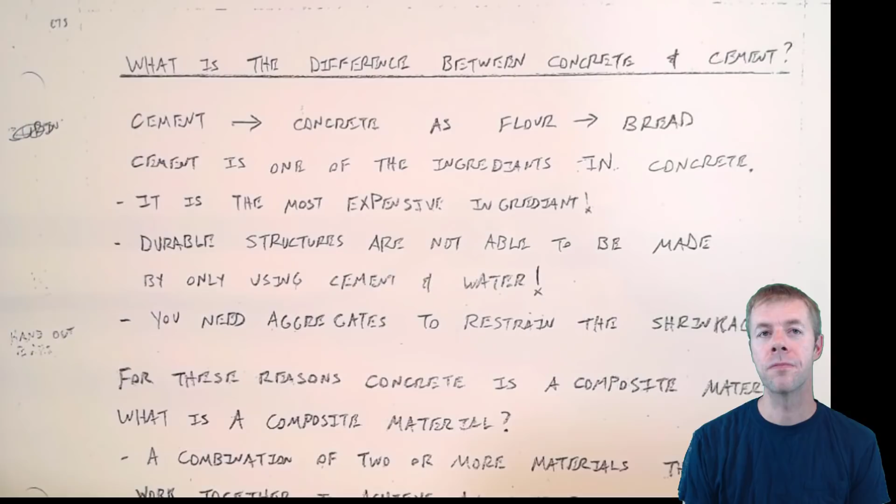It's called paste. We're going to learn all about these crazy terms today. Let's start with that question again: what is the difference between concrete and cement? Well, cement is to concrete as flour is to bread. Cement is one of the ingredients inside concrete. It's a really important ingredient. It happens to be the most expensive ingredient, but durable structures are not made by only using cement and water.

To make a durable structure, you're going to need to add aggregates. Why is that? Well, aggregates do lots of good stuff. One thing they do is restrain shrinkage. Shrinkage is where the concrete, or the cement paste, actually changes shape over time, usually because of changes in where water is. We need something to hold that back, and the aggregates do a great job of that. If I just had a big block of cement paste, that is cement plus water, it would crack itself up. Those aggregates help restrain those cracks. They won't happen—well, they might, but they'll be on a very small scale. They won't be as large.

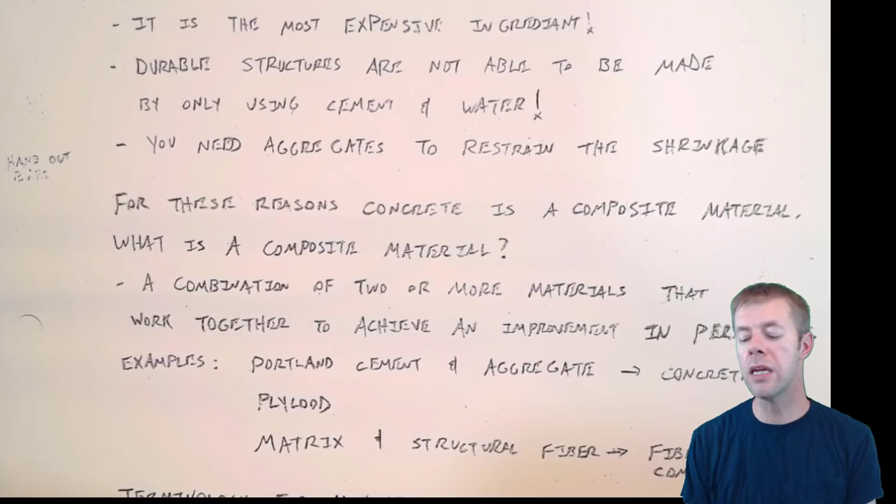Also, aggregates are way cheaper than cement. Way cheaper. So by adding it, you're diluting the material. But aggregates are pretty strong, right? Yeah, pretty strong. So you're diluting the material down, and you're getting something that's more durable. This idea where we combine two different materials together is called a composite material. It's a combination of two or more materials that work together to achieve an improvement in performance. That could be a reduction in cost, an improvement in mechanical performance, could be more sustainable—there's all kinds of good things composite materials can do. Composite materials are very powerful. And the most used composite material on earth is concrete, because it's awesome.

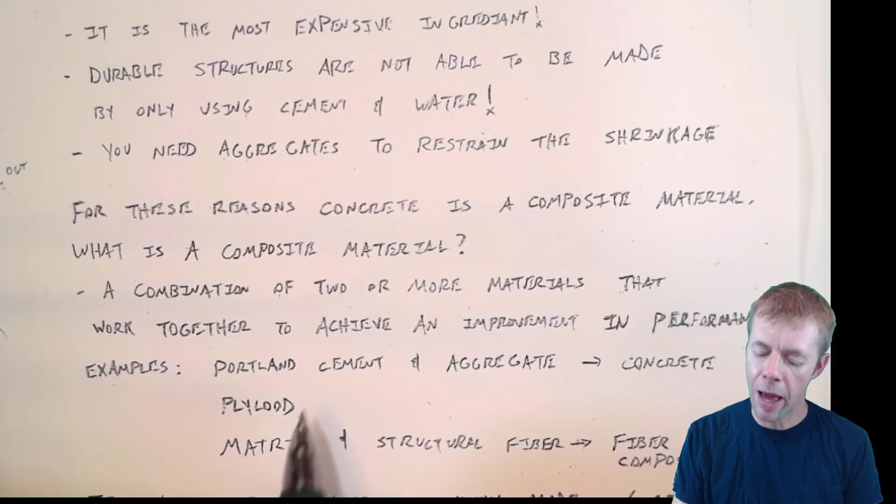So what are some examples? Portland cement plus water plus aggregates is how we make concrete. Again, extremely popular composite material.

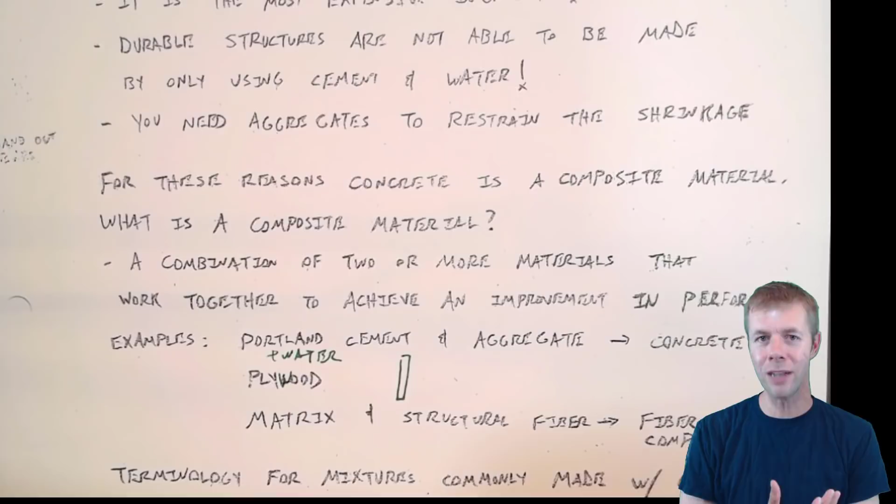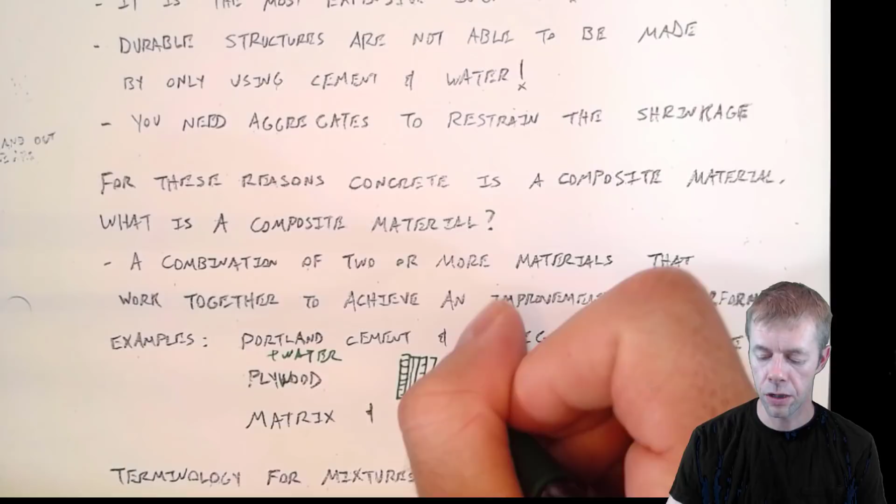There's also something called plywood. What's plywood? That's when you take thin sheets of wood and glue them together. Those thin pieces are from different cuts in a piece of wood. It helps keep them more dimensionally stable—meaning they don't change dimensions. So we may have one piece of wood cut this way, and another piece cut a different direction, with the grains going in an opposite direction. And then we'll come back with another one, and another one. Again, by gluing them all together, not only do you make it less expensive, but you get a better performing material.

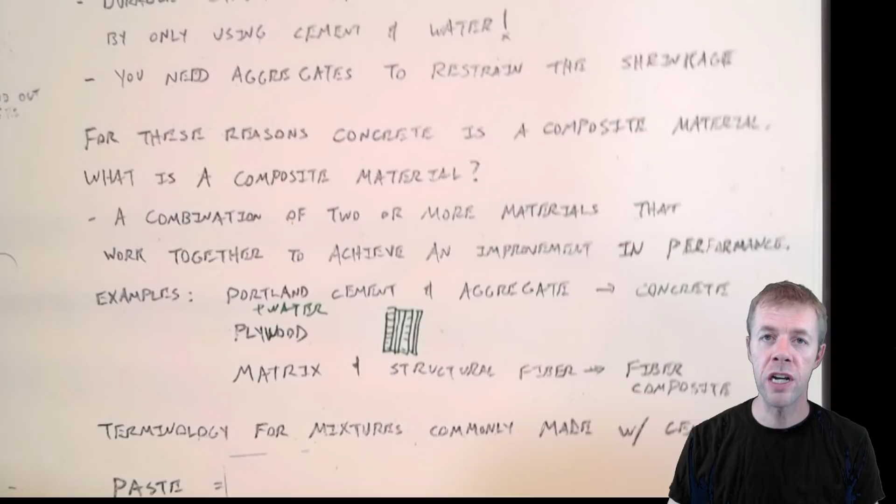Fiber composites, another very popular composite material. That's where you take structural fibers and maybe glue them in a fiberglass matrix to help hold them together. These little bitty fibers by themselves are not that strong, and the matrix is not that strong, but together, now they have pretty good strength.

It's pretty cool. Now let's talk about some more terminology. This is kind of the basic words, so you can start to set the world straight, because it's your job from now on to change people's minds about concrete, or let them know that it's not cement, it's concrete.

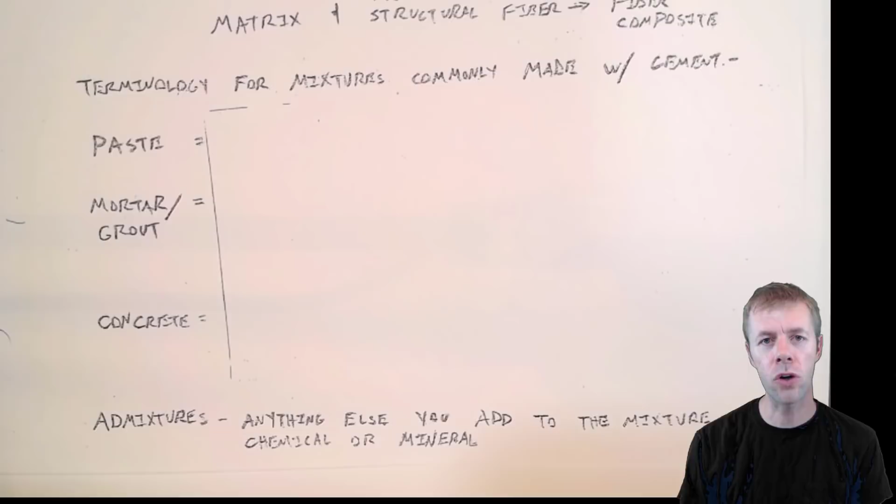Let's talk about paste. Paste is when you take cement and add water—that's how you get paste. When I call something paste, and I'm talking about concrete, that's what I'm talking about. It's like the glue that holds everything together. That's why it's called paste.

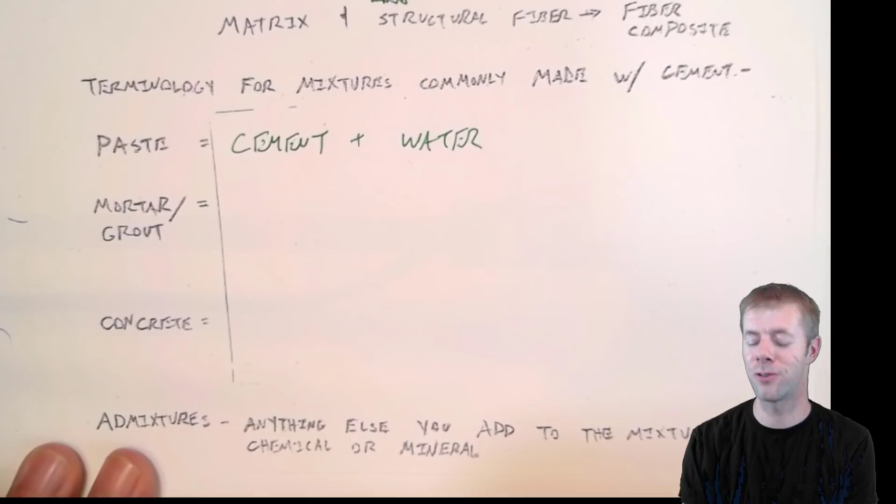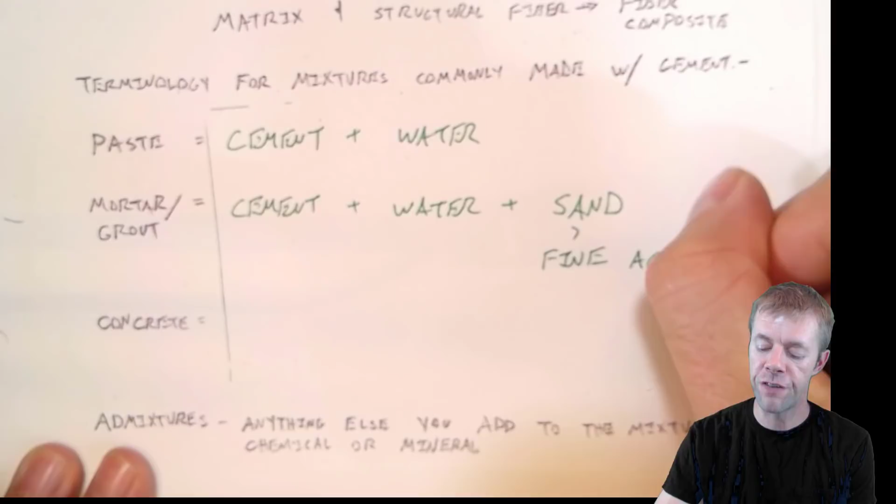Now let's talk about the next one. If I take my cement and add water to it, and add one more thing—if I add sand to that—then I get a grout. And sand is also known as, sometimes in this video, something called fine aggregate.

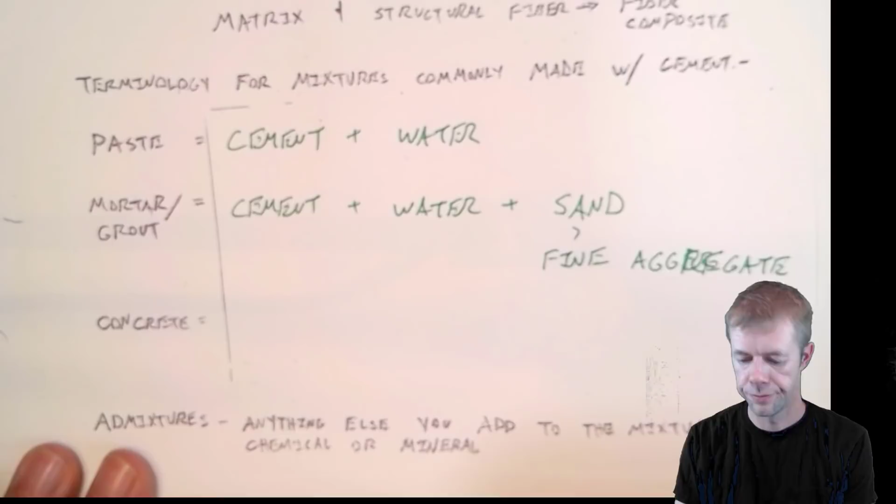Fine aggregate. Now, to make concrete though, we need one more ingredient. We need cement or some kind of binder. We need water. We need sand. And we need something called stone or gravel, or you might call them rocks. And the fancy term for rocks is something called coarse aggregate.

Fine aggregate, that's the small stuff. Coarse aggregate, that's the big stuff. And admixtures, oh man, we use a lot of admixtures. That's anything else you throw in the mix.

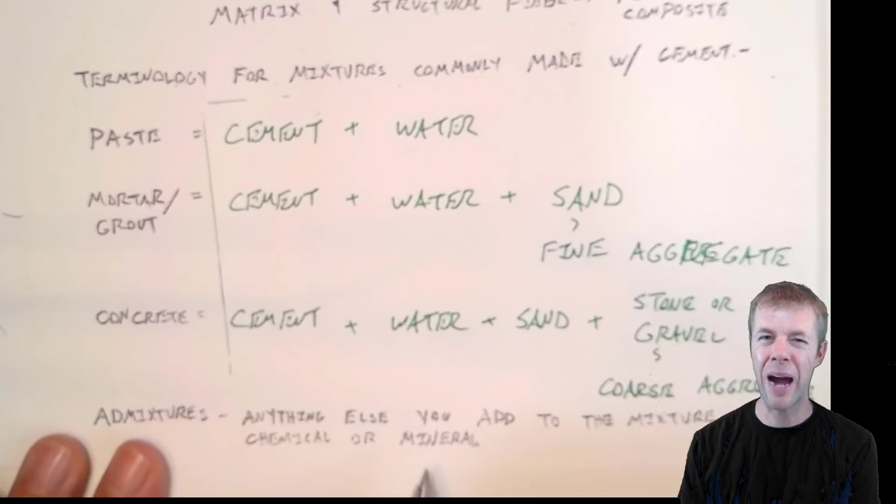That's all the herbs and spices that help really give it cool new properties. Admixtures are really exciting, we'll talk about them coming up. They may be chemicals you add, or they may be minerals, more like powders that you add. These are both kind of mislabeled names because pretty much anything you add is made up of a chemical, and a lot of things you add may be a mineral, and even minerals have chemicals in them. But historically, we've called them either chemical admixtures or mineral admixtures. We'll talk more about those coming up.

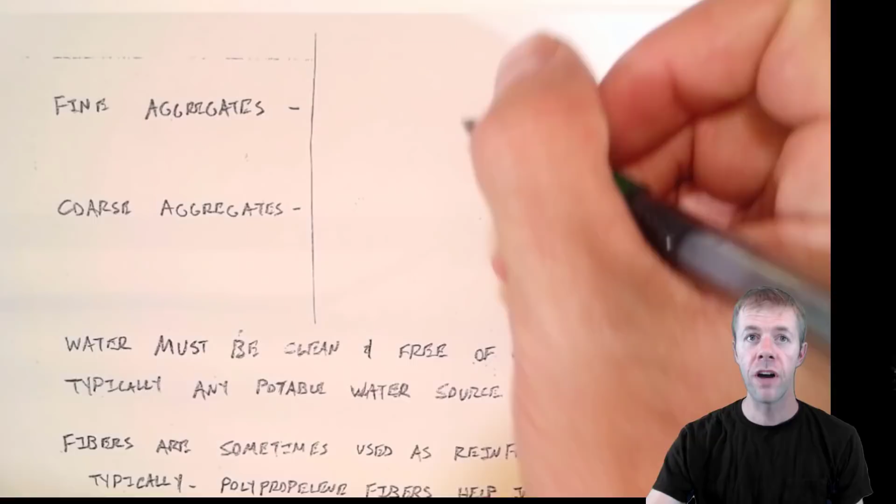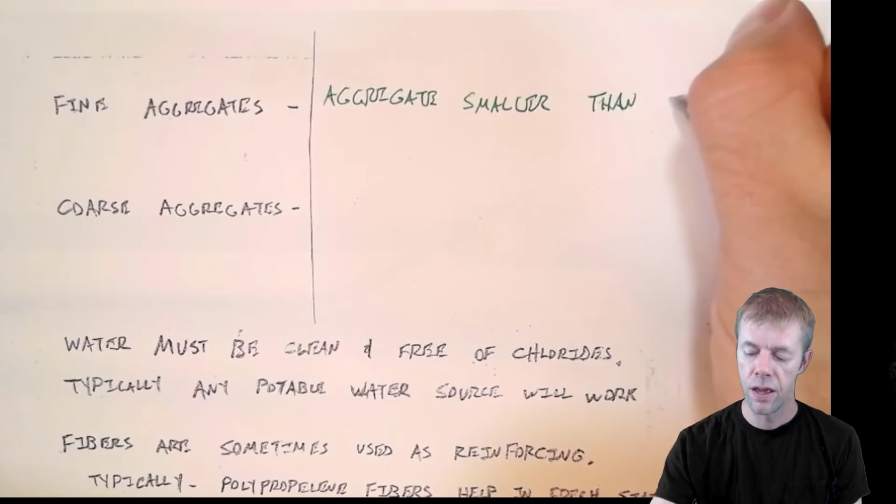Next, let's talk more about the aggregates. We said fine aggregate and coarse aggregate, fine aggregate's the sand and coarse aggregate's the larger stuff. Let's get a little bit more specific about that. Fine aggregate, that's aggregate smaller than a number 4 sieve.

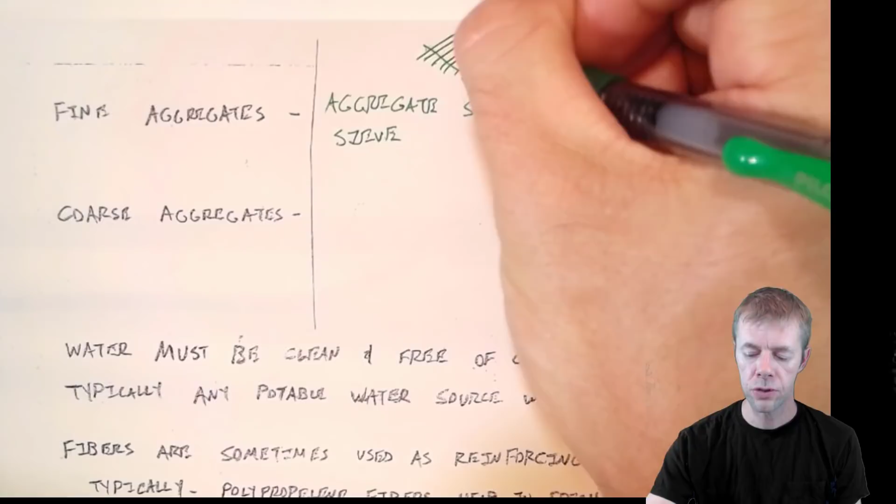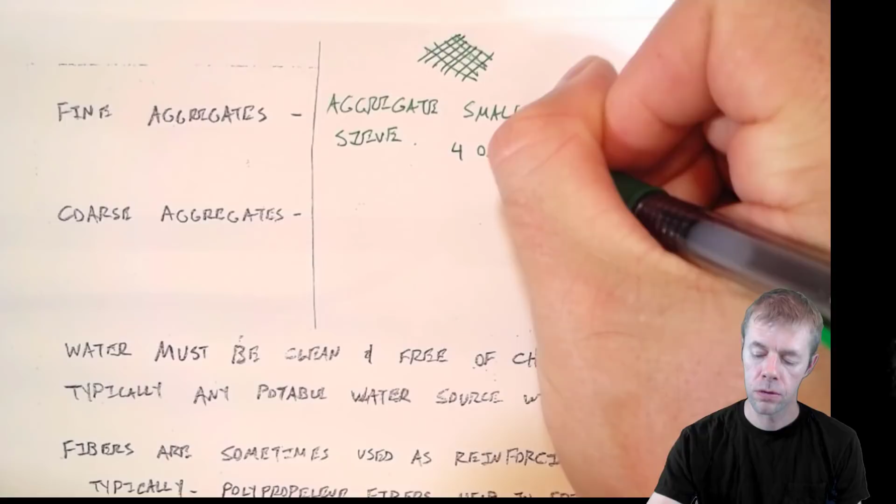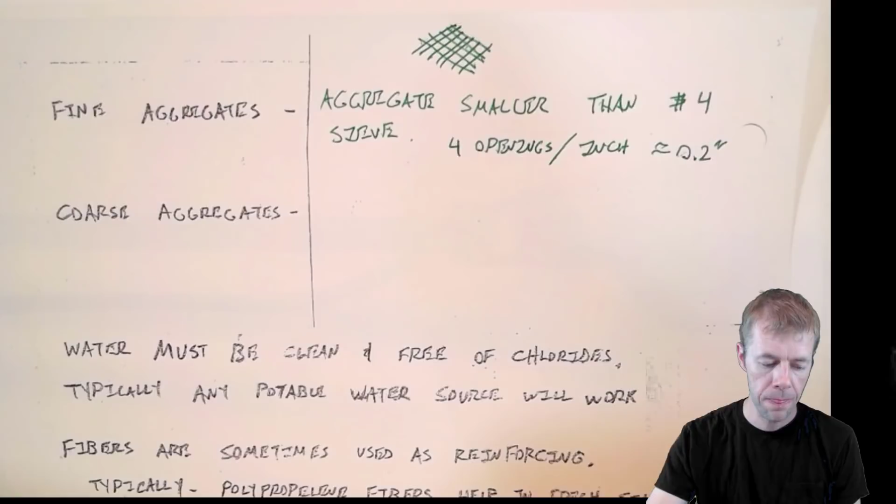What's a sieve? Well, a sieve is a screen with certain size openings in it. What does a number 4 sieve mean? That means 4 openings per inch, and the size of each one of those openings is about 0.2 inches, about. That's fine aggregate, so everything that goes through that sieve would be considered a fine aggregate.

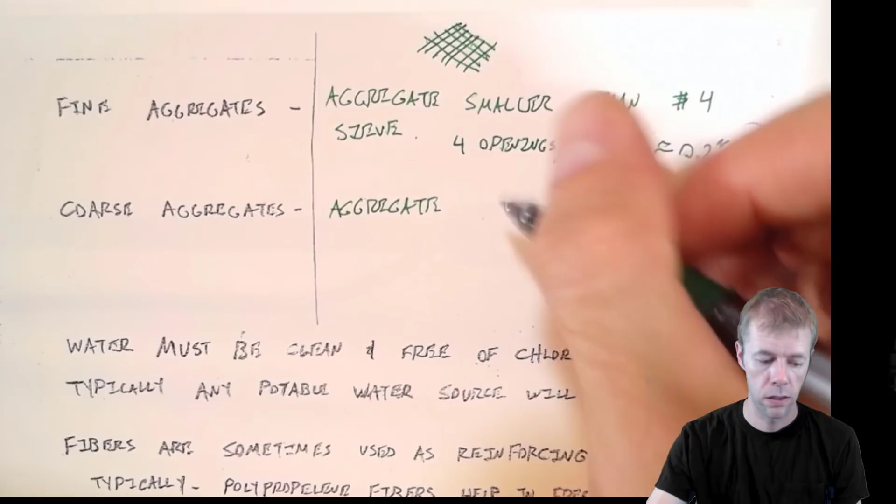Let's talk about coarse aggregate. That's aggregate larger than a number 4 sieve. That means everything that would be caught on this sieve would be considered a coarse aggregate. We may have different sizes, and it's typical to talk about different sizes of aggregates. We'll talk more about that later.

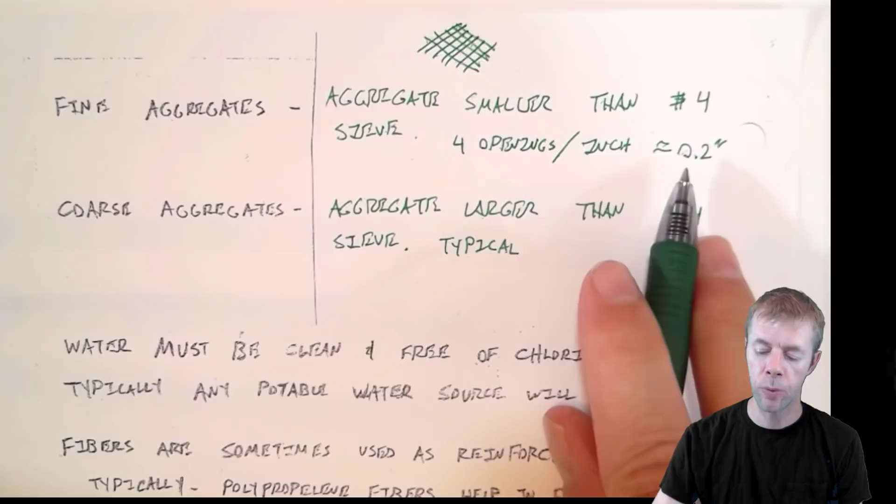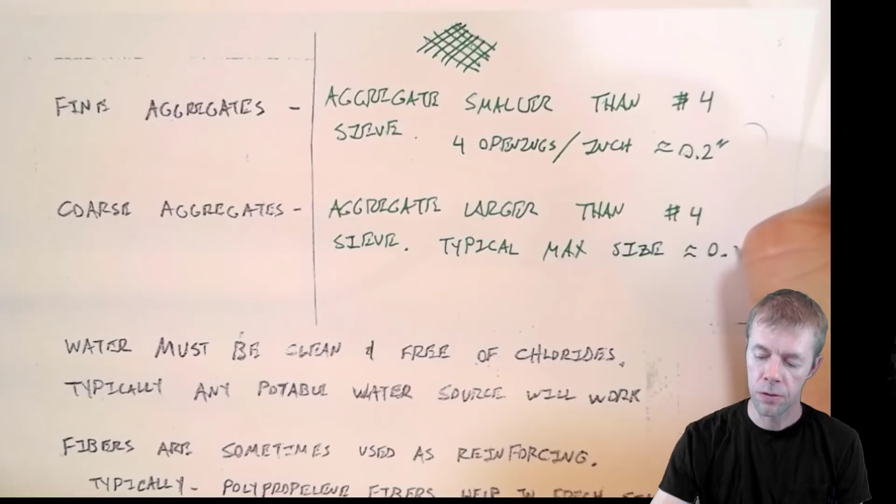Typically, our coarse aggregates range anywhere from about 0.2 inch to a typical maximum size of about 1 inch. But sometimes we do use larger rocks, depending on the application, especially in dams, they'll use very, very large rocks sometimes in those structures.

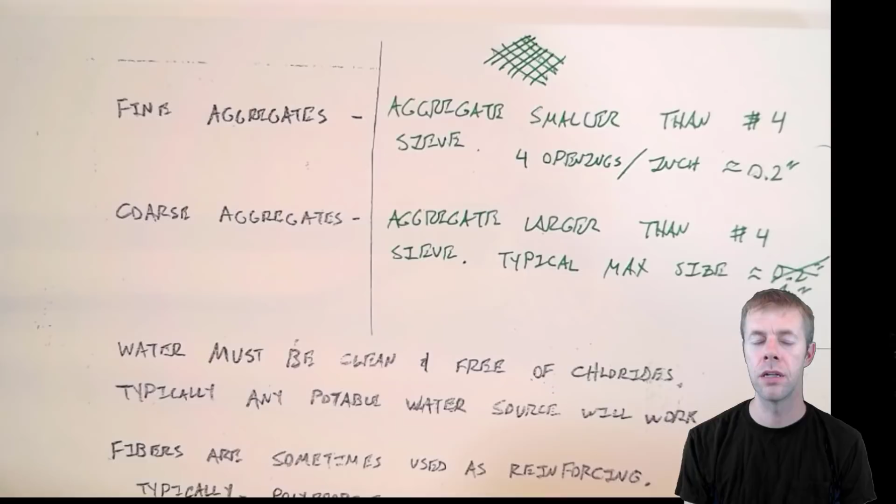Now we've moved past the rocks. Actually, about 70 to 80% of the volume in concrete is made out of aggregates. It's crazy, right? What about water?

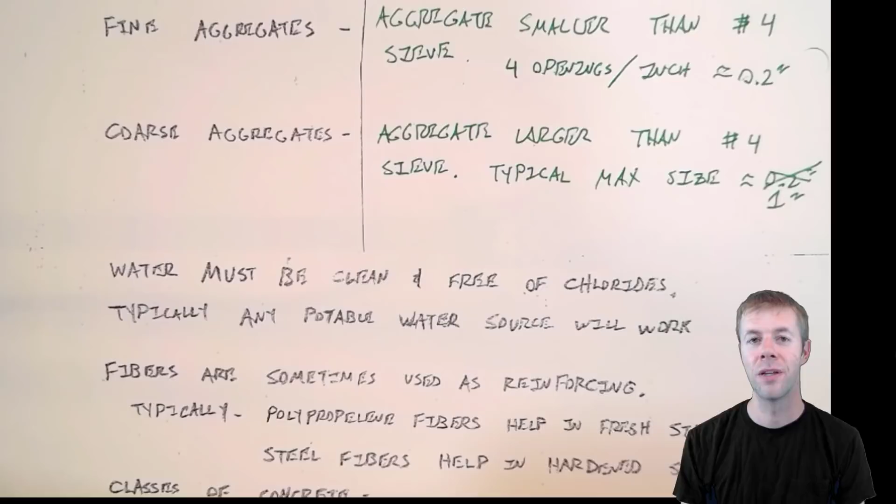Water's pretty important. Water's what reacts with the cement. The water must be clean and free of chlorides. Here's why: chlorides attack your steel, they cause corrosion, you've got to watch out for them. You don't want them in your water, and you don't want to begin with chlorides already inside your concrete. That'd be bad.

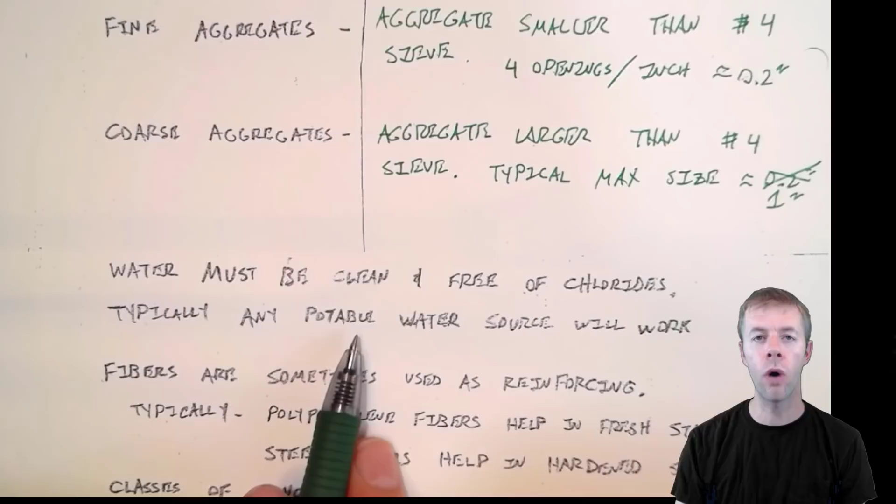Typically, any potable water source can be used. What's potable mean? That means you can drink it. If you can drink it, then you can use it for concrete. Now, there are some non-potable water sources out there, and you'll have to check your local specifications to see what people allow and don't allow.

Now, sometimes we have other ingredients like fibers. Fibers help hold the concrete together if it cracks, and they're becoming more and more popular. They're used as reinforcement, so we don't always have to use rebar. Sometimes you can use fibers, or you can use both rebar and fibers together. It's pretty cool. There's two main types of fibers that we use in concrete.

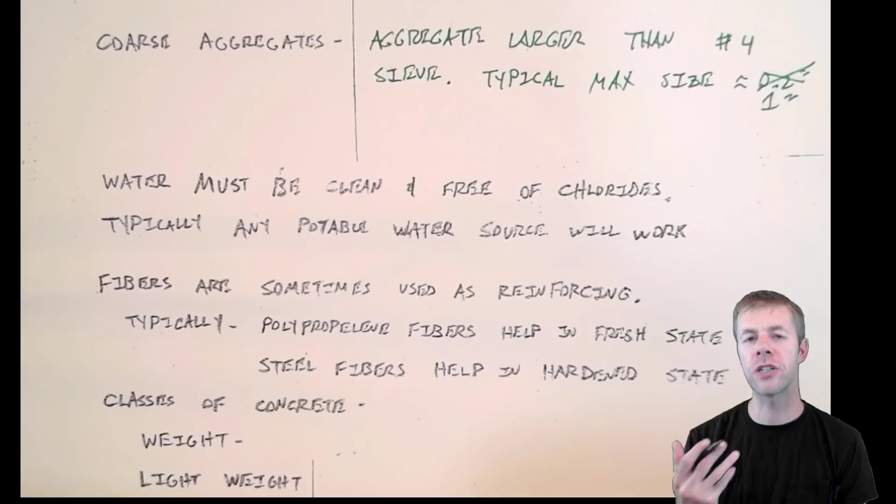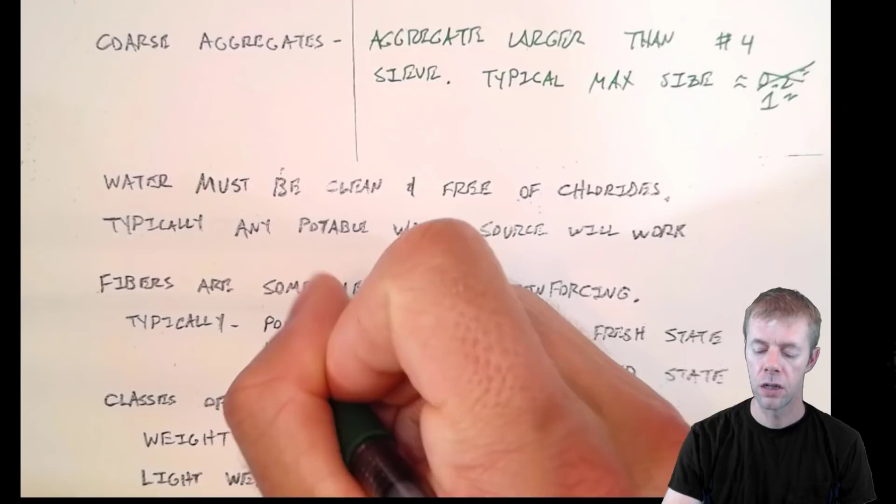We use polypropylene fibers, those are really, really flexible plastic fibers, and they help in the fresh state, right as the concrete's hardening, right as it's setting, right as it's gaining strength, really early in its age. And then we'll use steel fibers, but there's also hard plastic fibers.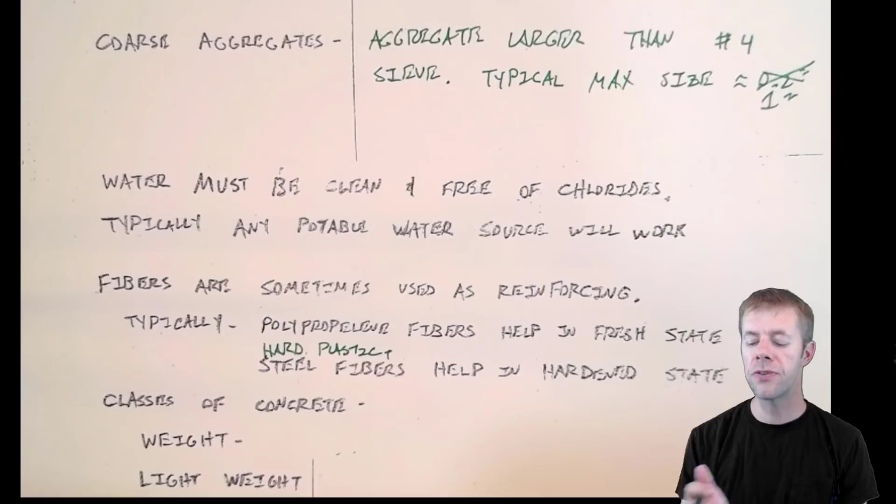So there's steel and hard plastic fibers, and these will help in the hardened state. These help if a crack starts to form. The idea is these fibers help stitch the crack together. So if a crack forms, and if you had a fiber going across the crack, it would keep that crack small, it would keep that crack from becoming too large.

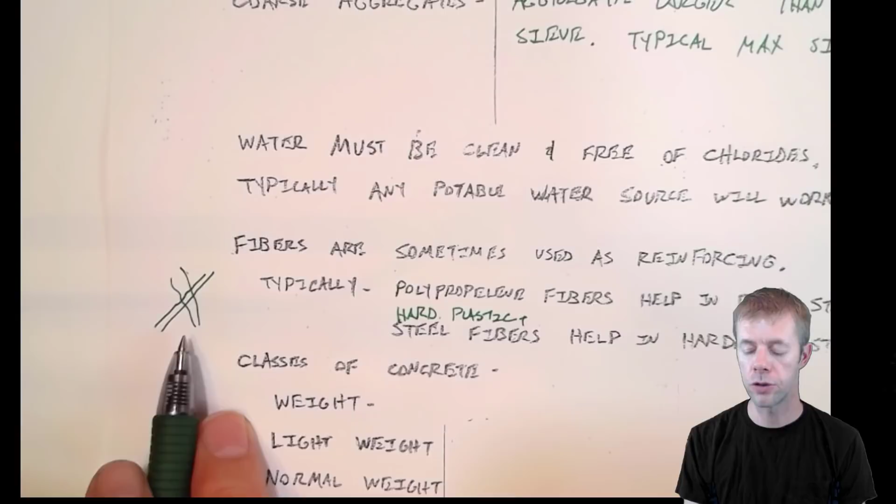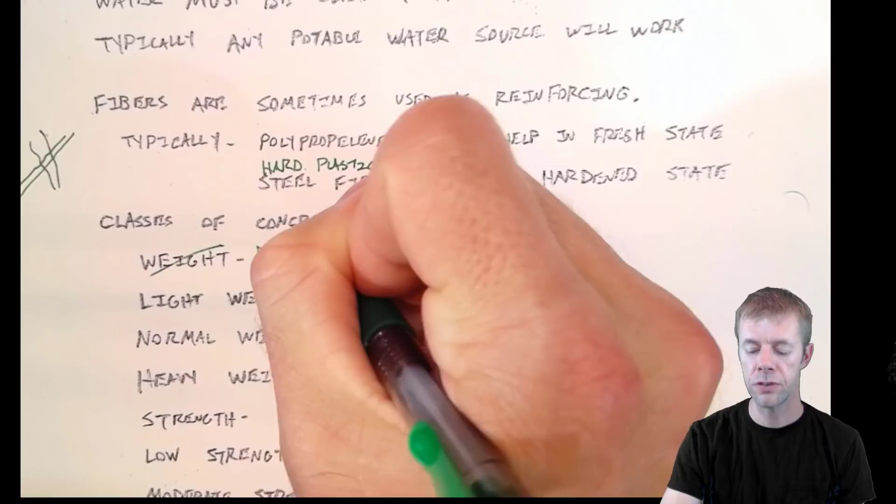Let's talk about classes of concrete. One good way to talk about them - people sometimes call it weight, but a much better term is density. This is the weight of the material per volume.

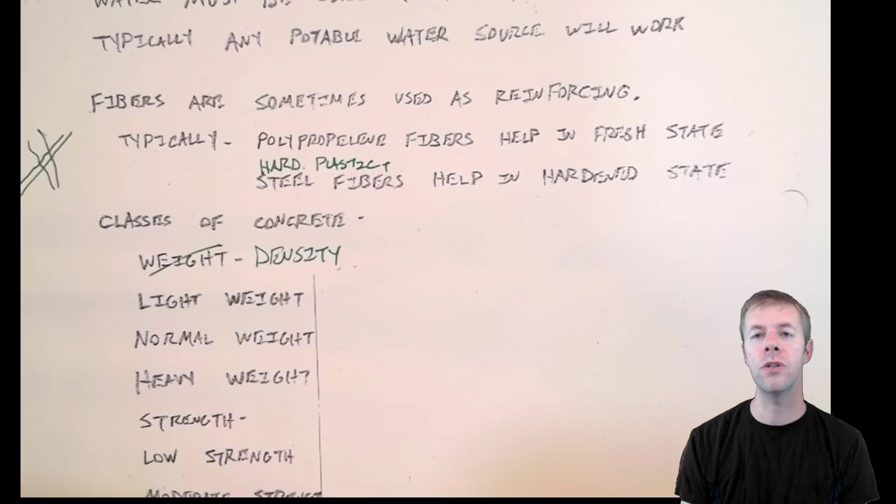When we talk about lightweight concrete, why would you ever use it? Well, if you had a structure and wanted to reduce the initial weight, the dead load can be extremely high. If you can reduce that, you can use a more economical structure. So typical lightweight concrete, you want the density to be less than 110 pounds per cubic foot.

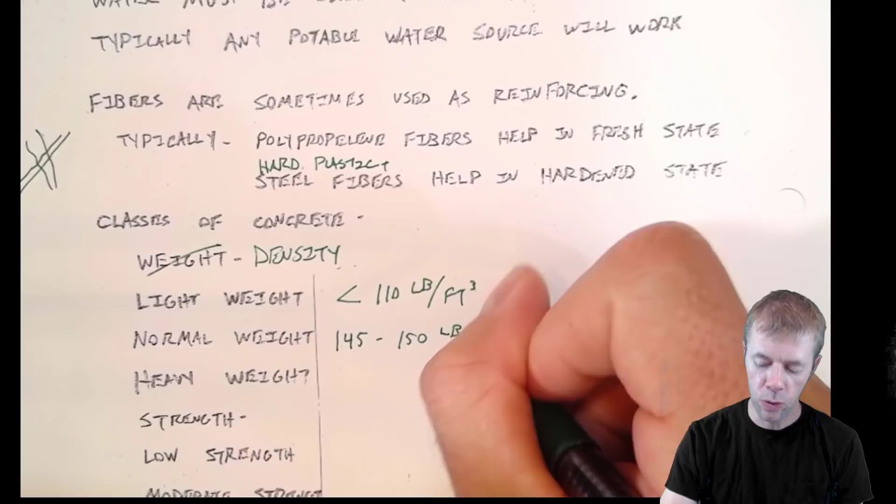In metric terms, that's 1,760 kilograms per cubic meter. Our normal weight concrete is somewhere between 145 to 150 pounds per cubic foot. So a typical foot of concrete - a foot by foot by foot - weighs somewhere between 145 and 150 pounds. In metric, that's between 2,300 and 2,400 kilograms per cubic meter.

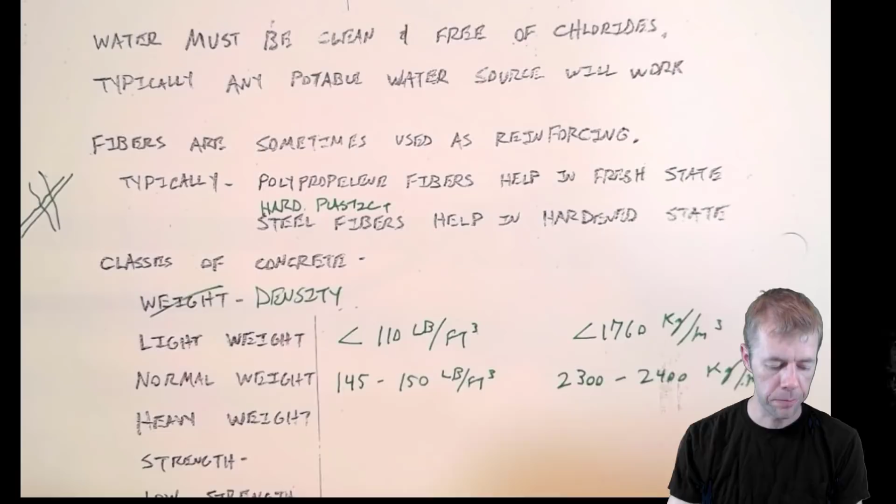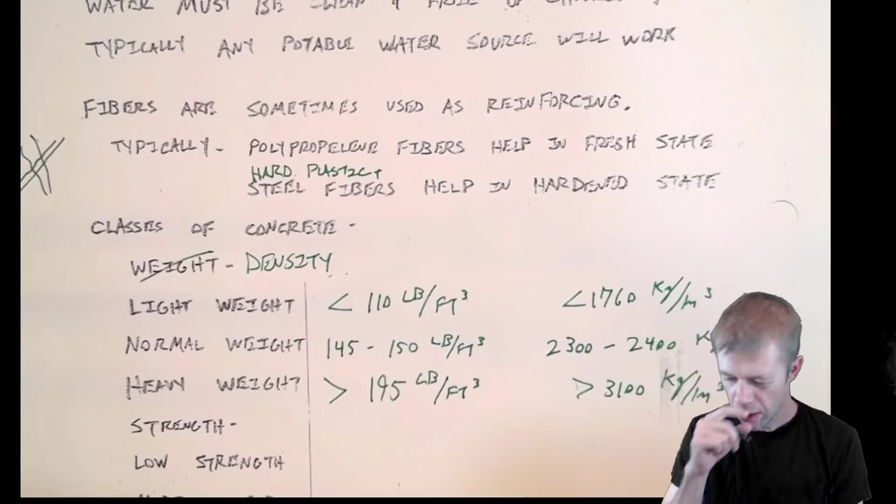And then sometimes, very rarely, we'll get to something called heavyweight concrete. Heavyweight concrete is about anything over 195 pounds per cubic foot, or a metric equivalent of 3,100 kilograms per meter cubed.

So how do we change the density of concrete? Well, about 70% of the volume is aggregates, so that's the easiest way to change it. If you want lightweight concrete, you use lightweight aggregates - pumice or expanded shale, something that has air inside of it. So you're casting more air inside your concrete.

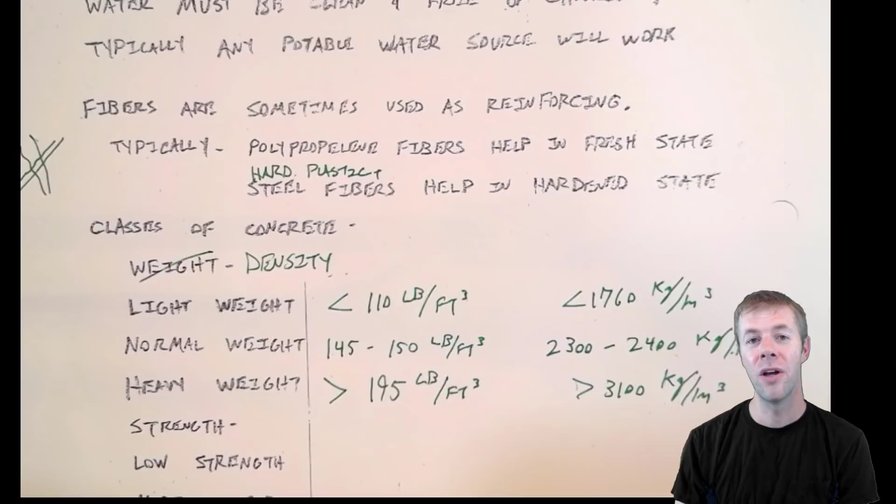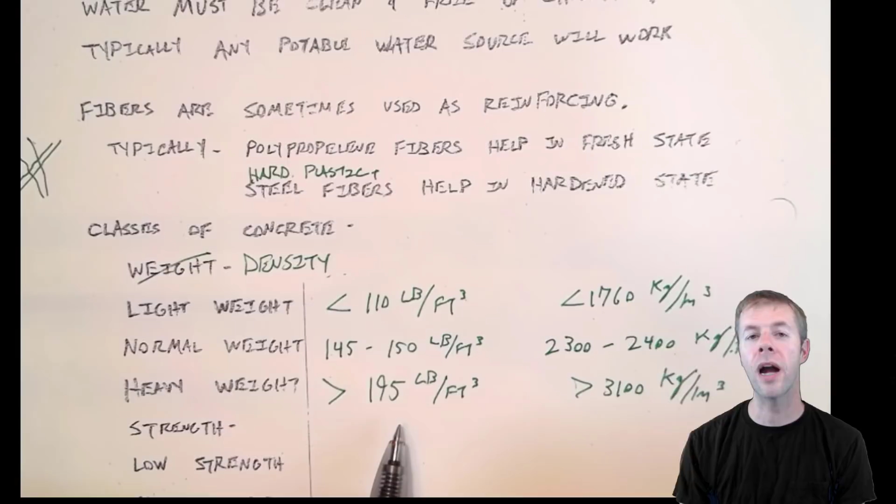Pretty awesome, right? And if you want heavyweight concrete, you need really, really heavy aggregates - things like pieces of steel that you use as aggregates inside your concrete. Why would you ever need heavyweight concrete? Sometimes you just need a lot of weight, but commonly they use it in shielding for nuclear reactors, for x-rays sometimes. Now let's talk about strength.

When people talk strength in concrete - if you talk to a normal concrete person on the street, if you could find one, and ask, what's the strength of your concrete? Almost always they are talking compressive strength. That's the test we talk a lot about, compressive strength.

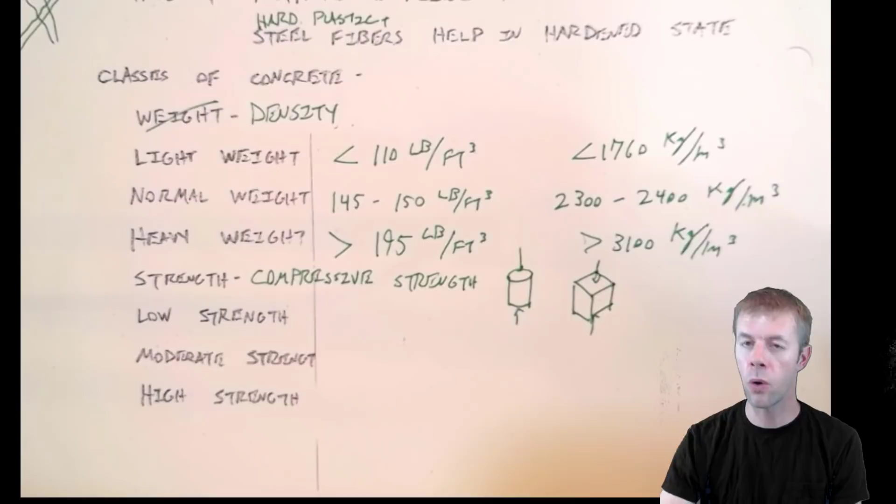In America, when we test compressive strength, we're testing cylinders, and there'll be a whole big lecture coming up on cylinders. In Europe and other countries, they often test cubes made out of concrete that they load until they break. They load them like this, and like this, and like this. Don't worry, a lot more coming on that.

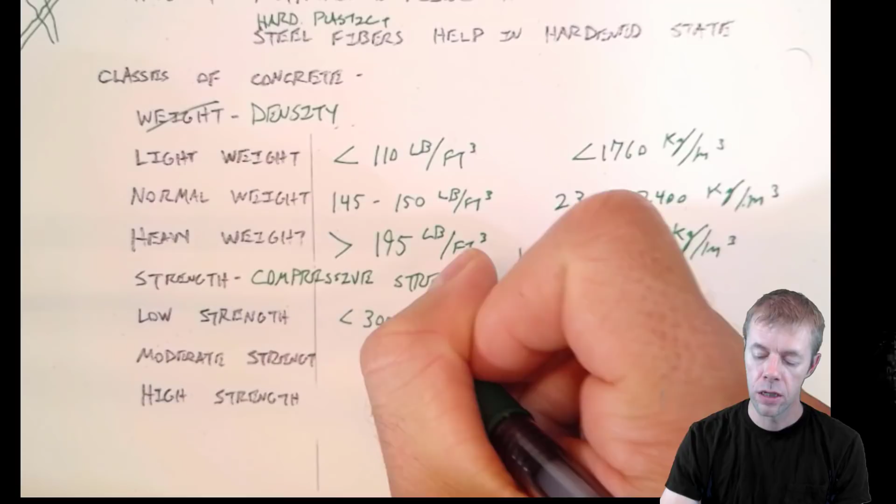If we have something called low strength concrete, that's kind of lower strength - we would say something like less than 3,000 PSI would be a pretty low strength concrete. In the metric equivalent, that's less than about 20 MPa.

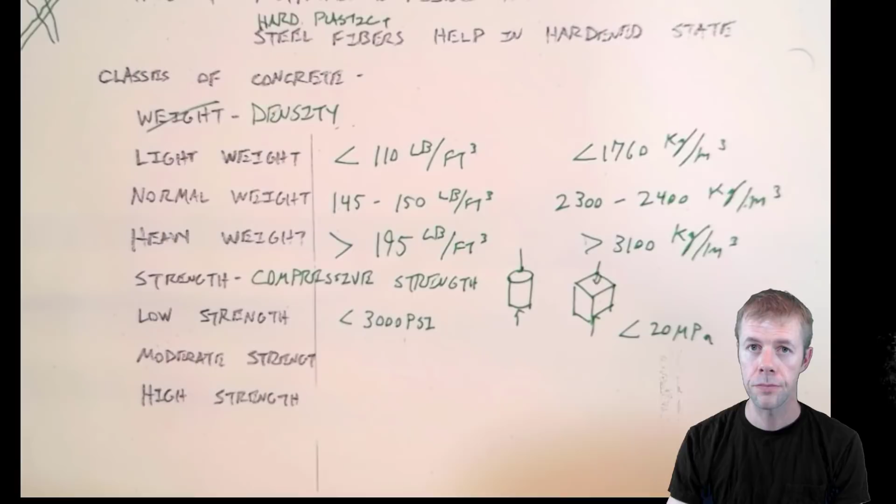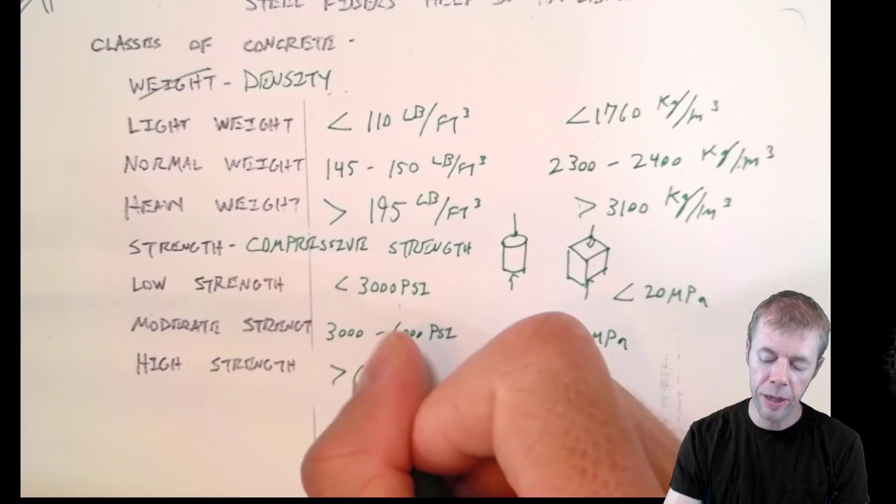If we talk moderate strength concrete, that's somewhere between 3,000 and 6,000 PSI, or in metric, between 20 to 40 MPa. High strength concrete - it's tough to pick a number here, but a good estimate is anything over 6,000 PSI. This is not an official definition, but anything greater than 6,000 PSI is higher strength concrete, and that's greater than 40 MPa.

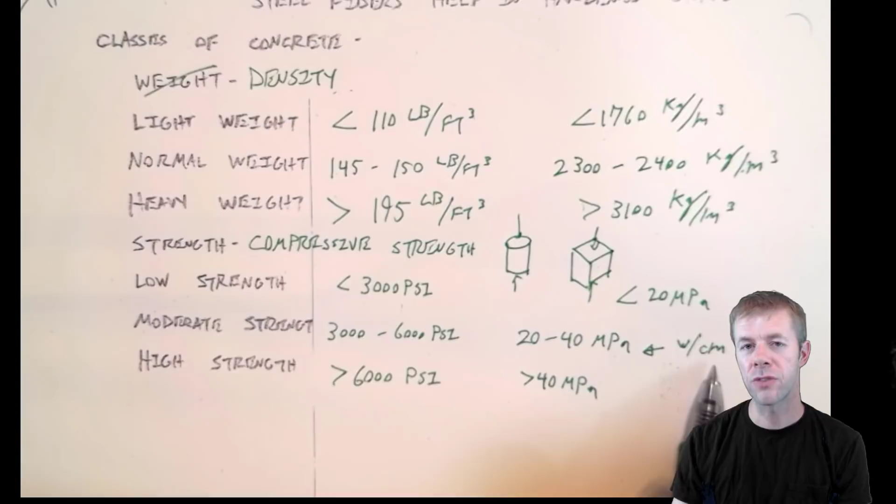We're going to find later on that actually the key to the strength of concrete - or one of the main keys, there's several - is the water to cement ratio. We call it the WCM. W stands for water, CM stands for cement or cementitious binder - water to cementitious ratio. This value, to get this range, is somewhere between a 0.4 to a 0.6 water to cement ratio.

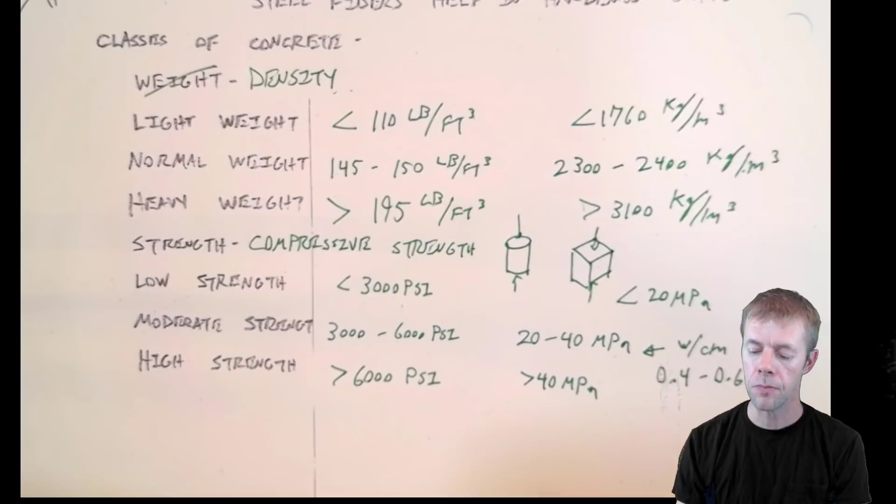Now, historically, people have always talked about strength as being the main measure of quality for concrete, and for a long time that's right, it was. But things have changed a lot. We've got a lot better tests out there besides strength, because things can be super strong, but if they're not durable, or if they're not constructible, they're not that useful to us. We need all of these things: durable, constructible, and strong - at least strong enough. Don't worry, talk more about that coming up.

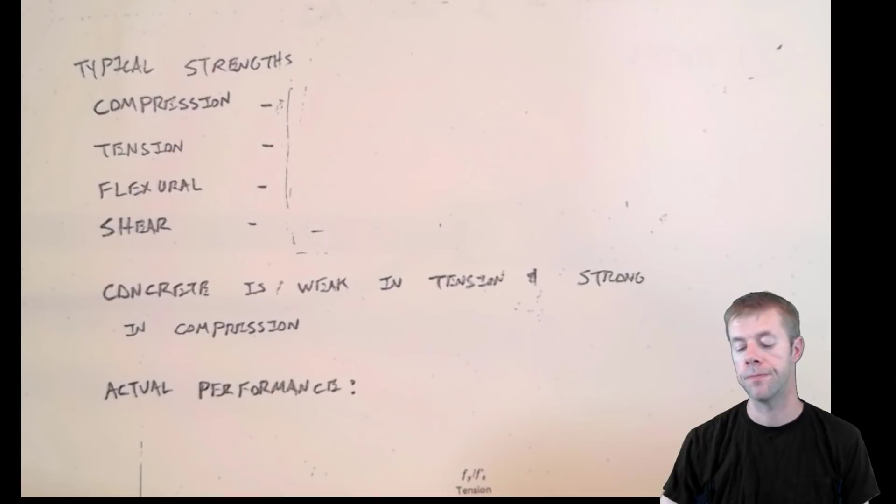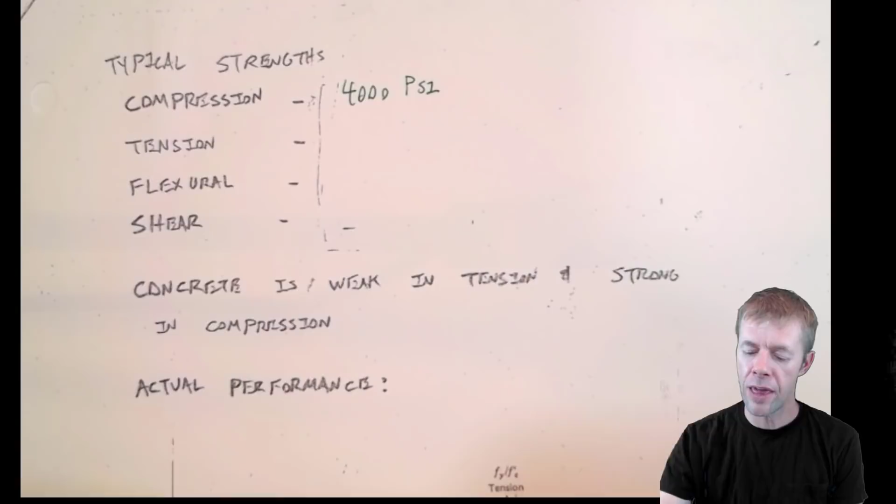So compressive strength is not the only strength that we measure or care about - there are other ones. If we picked a concrete that had a compressive strength of about 4,000 PSI - kind of middle of the road, maybe a little bit lower strength than what we would typically see today, but that happens - the way we would measure that is we'd take something like a cylinder or a cube, and we would load it like that.

If we were going to try to measure the tensile strength - one thing I forgot to bring up is this is often called FC, which usually means the compressive strength of concrete. And if we're looking for the tensile strength, usually the tensile strength is about 10% of the compression strength.

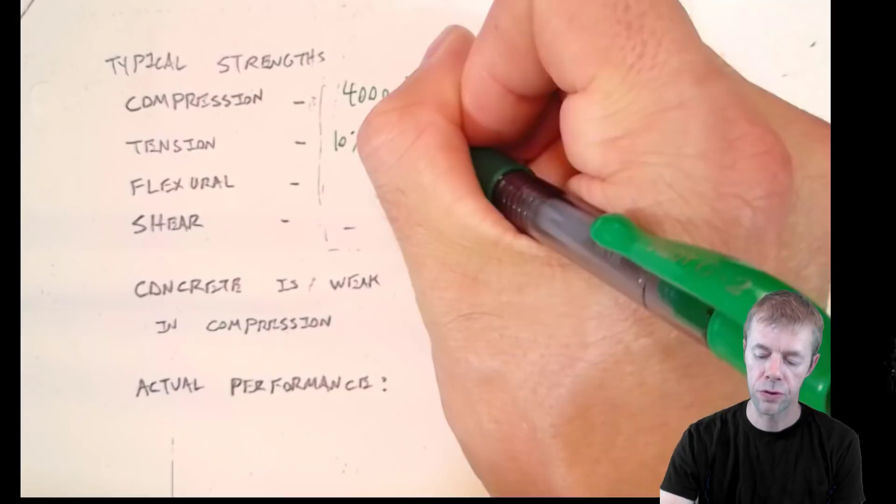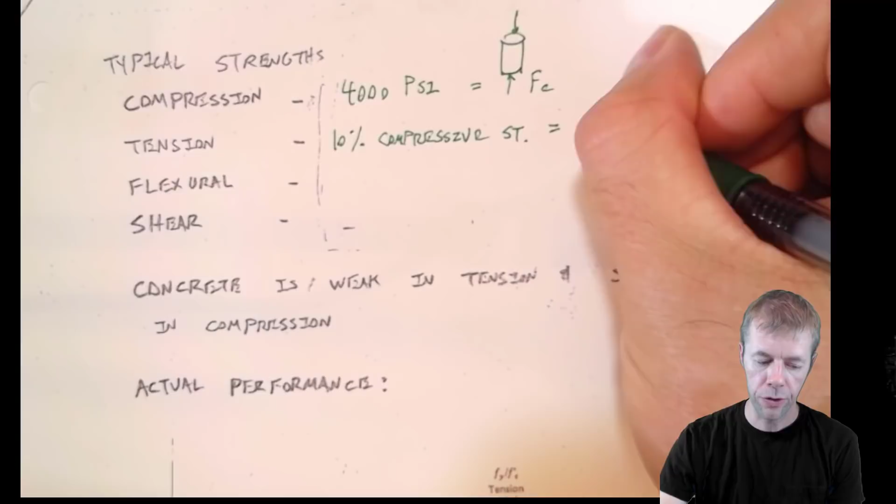So this is like an equation: 10% of the compressive strength is equal to the tension strength. So we'd say that's around 400 PSI. This is the same thing as about 28 MPa for compressive strength, and this is the same thing as 2.8 MPa for tension strength.

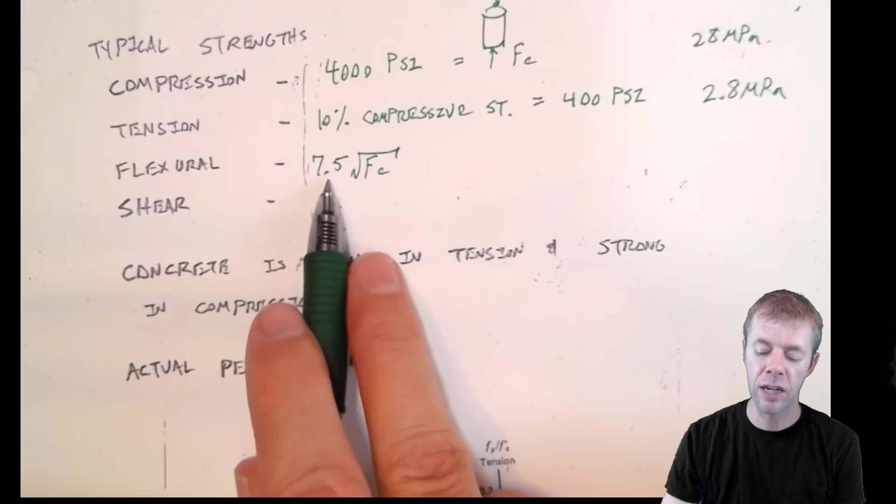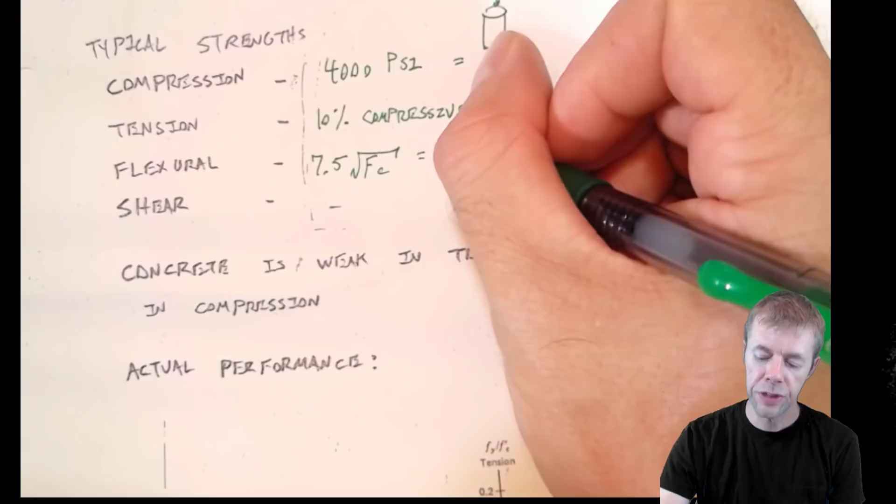When it comes to flexural capacity, an equation people often find useful is that if I have the compressive strength, the flexural strength equals 7.5 times the square root of the compressive strength, which is about 475 PSI in this case. That doesn't mean flexural strength of concrete will always be 475 PSI, but with 4,000 PSI concrete, that's a good estimate, or equal to 3.3 MPa.

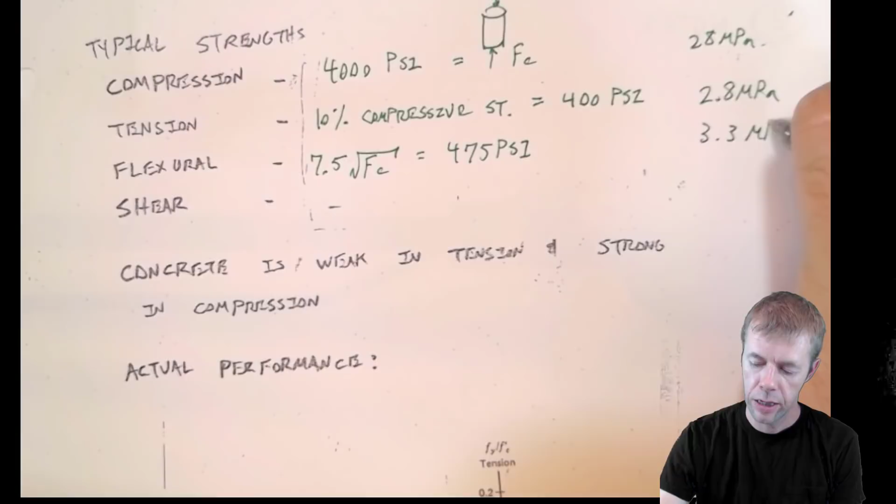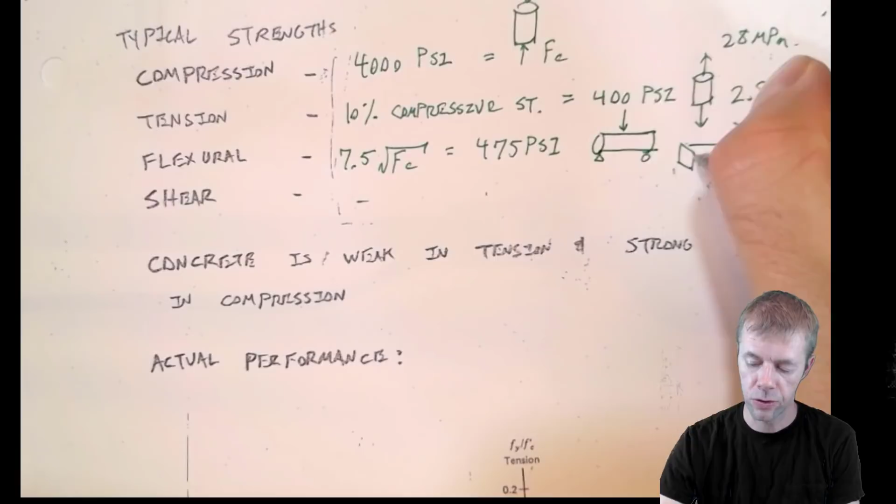So how would you measure these things? With tensile strength, you'd take one of these cylinders and pull on it. Not a very easy test to do, that's why very few people do it. If you wanted to measure flexural strength, instead of a cylinder, people often use beams to do this - you'd take a member and load it down the middle. Again, people often use beams to measure flexural strength because it has a uniform cross-section, and they'd load it like that.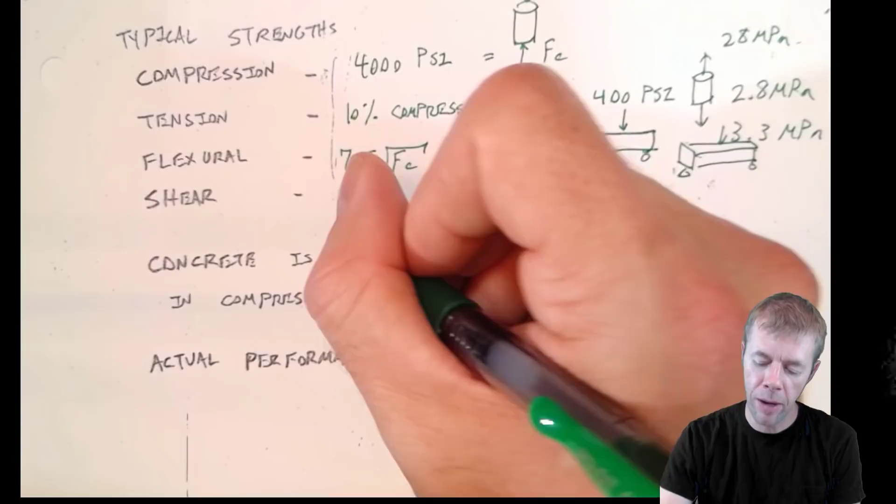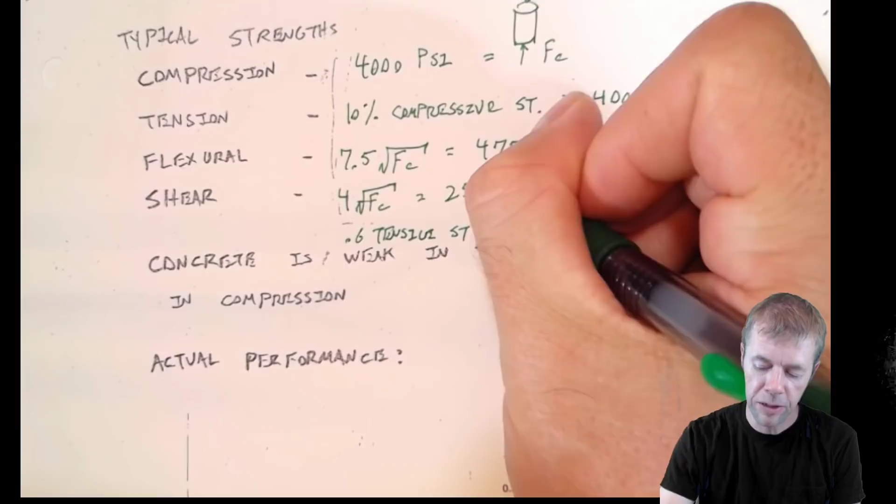The last one we're going to talk about today is shear strength. The equation is 4 times the square root of F prime C, or another estimate is about 0.6 times the tensile strength. These numbers come out to be about 250 PSI, which comes out to about 1.7 MPa.

You'd say, well, what's the shear strength? That's when these members fail, but they don't fail down here - the shear would be if they failed something like this. Flexure would be if they failed down at the bottom.

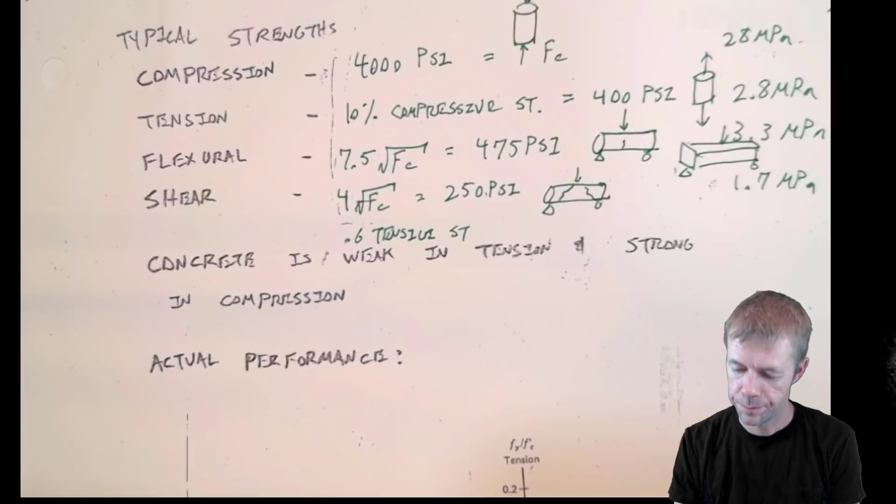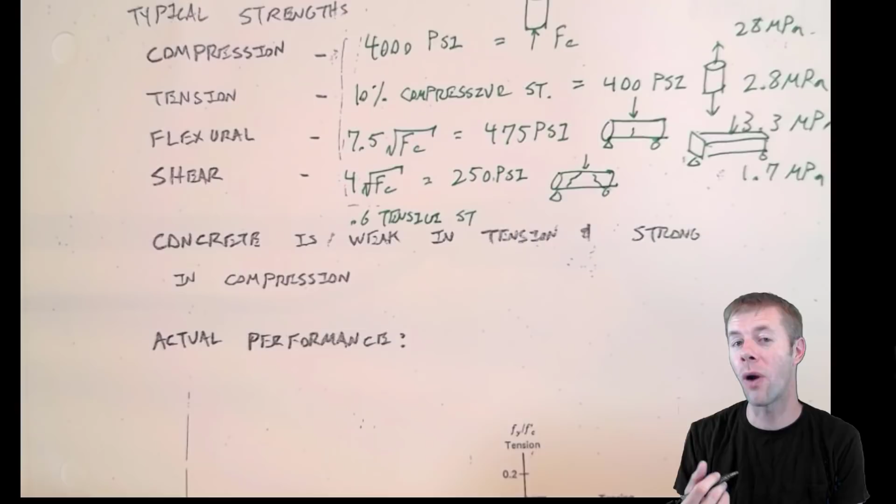So as we can see from all this, concrete is weak in tension and strong in compression. So we should try to use it where it's strong, right? And if we find out it's going to be in tension somewhere, we just need to make sure we have reinforcing there to hold together once it cracks.

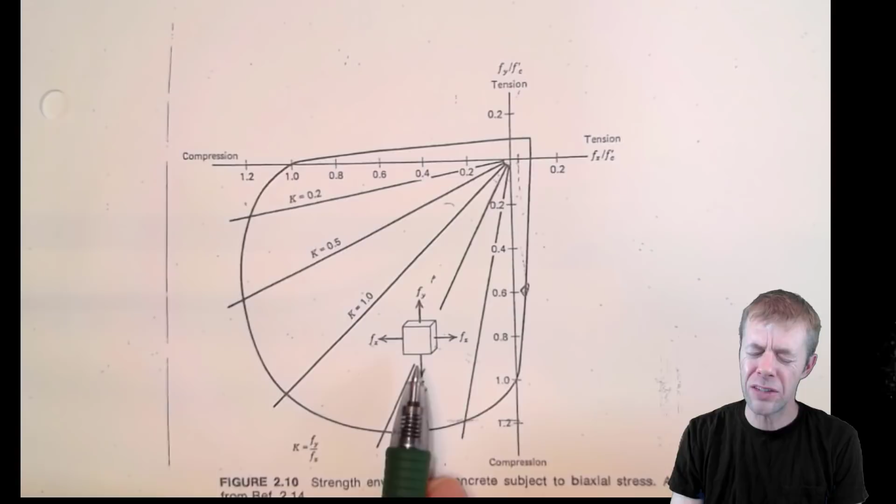Let's talk about one more thing - I've got something titled actual performance, and I have this fancy plot shown here. What this is saying is that in real structures, often we don't have little cylinders that are in pure compression or pure tension. We're not that lucky, it's more complicated than that. You have to look at combinations of stresses.

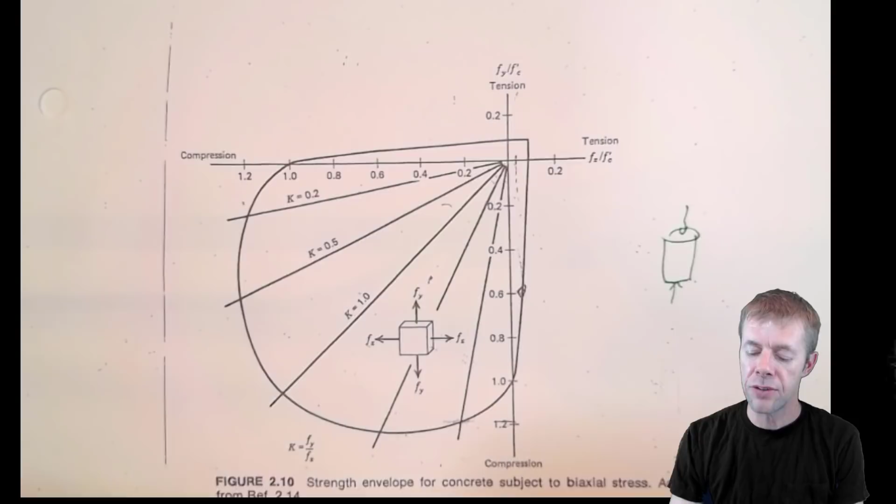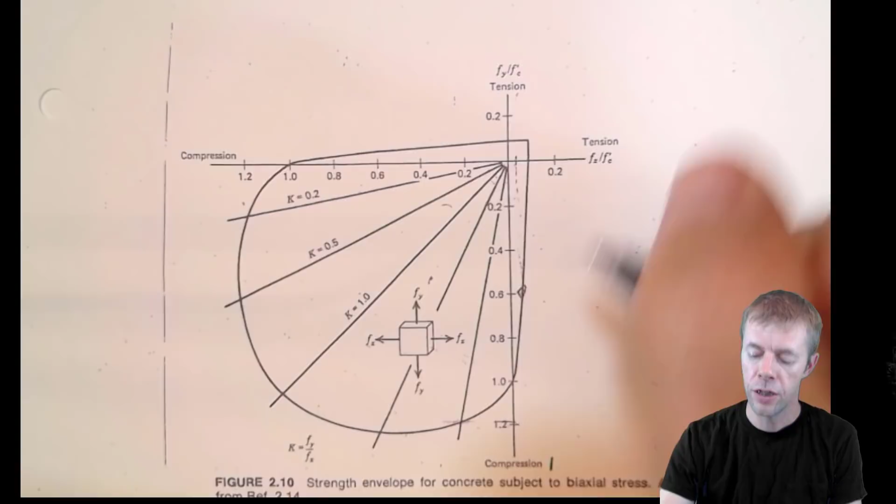What this plot is trying to show and prove is that if I have this single element, you can think of it as a piece of a much larger structure. On one axis is the load on one face, and on another axis is the load on another face. You could call this axis number 1 and axis number 2, load number 1 and load number 2.

This says that if I have pure compression, if I'm on this line with no tension at all and no load in any other direction, it's going to fail at 1.0 - that's the crushing strength of the material. And in tension, it's going to fail at about 0.1, 10% - that's pure tension. But it's interesting that the allowable stress, this outside ring, is the allowable load you can put on the actual concrete before it breaks.

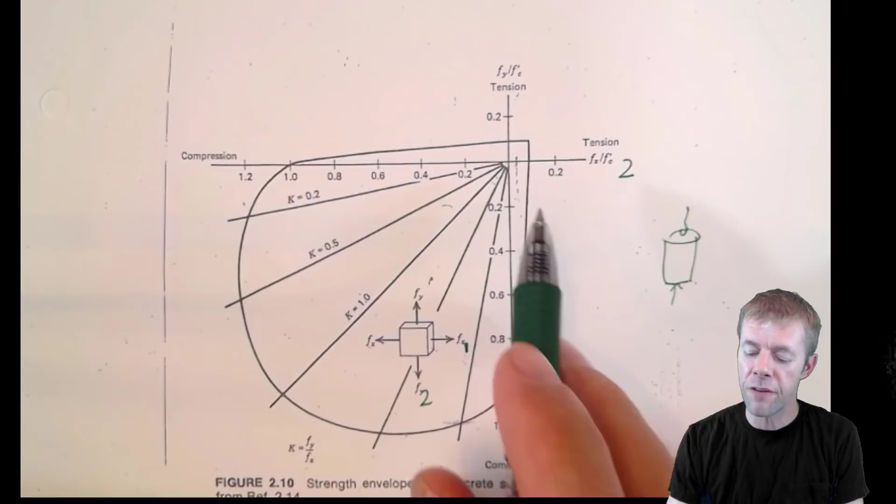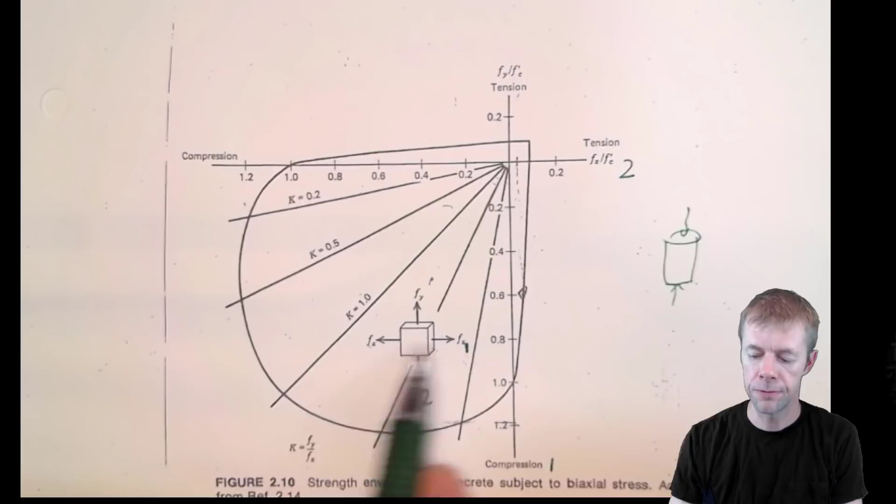If I put maybe 40% of the crush load in one direction, then start loading it - 40% in this direction, 40% in this direction - and I keep loading it the other direction, then I'm actually going to get a higher strength. I can get 20% higher strength. Wow, that's crazy - you can get a higher strength by preloading it in one direction.

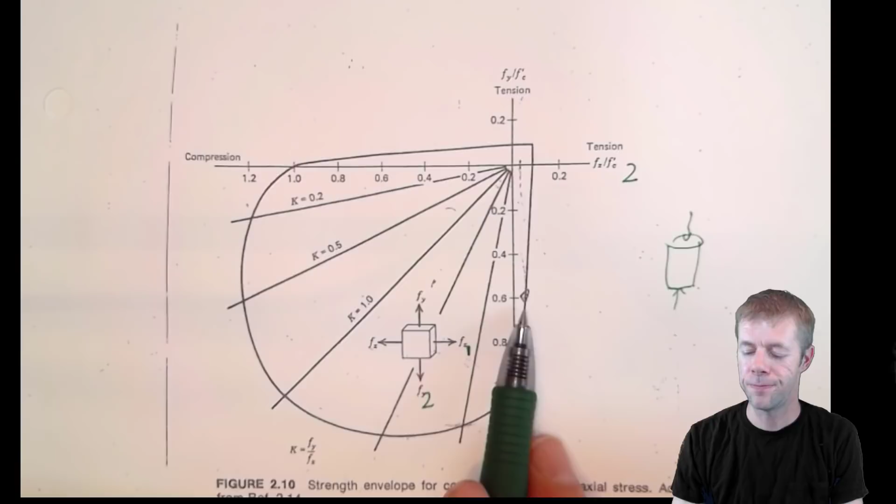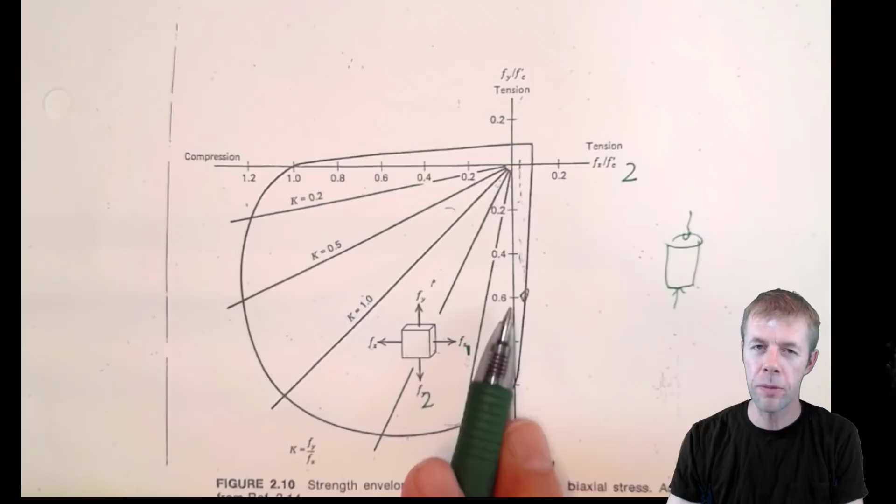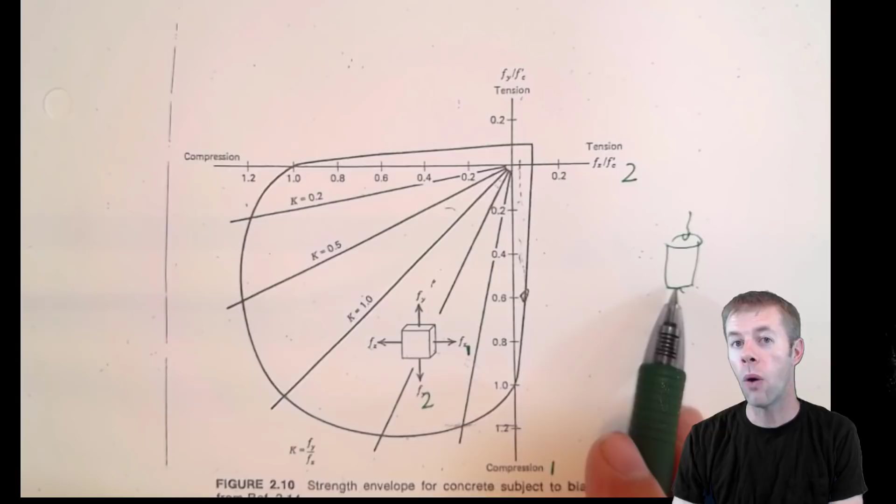But let's look at the bad news. If I even pull a little bit - let's say half the tensile strength, like 0.05 of the compression strength in one direction - my strength drops greatly. If I go down this line here, I'd only be able to take 0.6 of my compressive strength before it breaks. Isn't that crazy? The whole takeaway from this plot is that in real life, our structures are loaded in very different ways than these perfect, ideal cylinders. However, these cylinders or specimens do give us insight into how these much larger structures are going to perform.